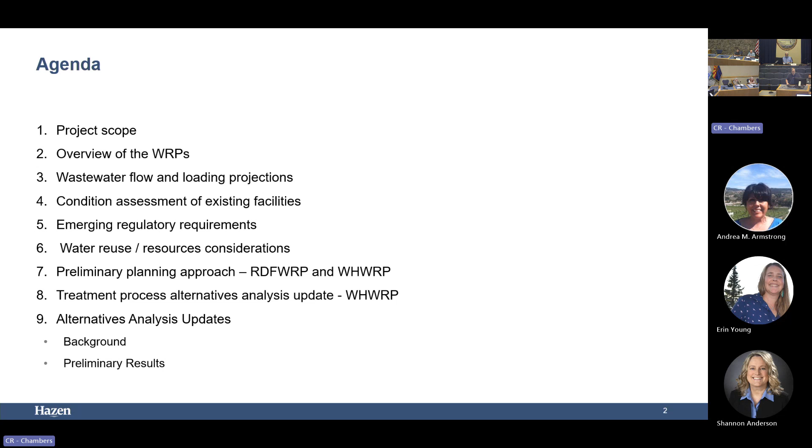So this is still a work in progress, just a caveat before I keep talking. The purpose of the project, from a slide at a kickoff meeting held with this body about a year ago, is to address the near and long-term management of wastewater and biosolids produced at the Rio de Flag and Wildcat Hill water reclamation facilities. It's an element of your Strategic Plan 2025 for the Water Services utility, to address Wildcat Hill in particular, but the way the system works, those two facilities are basically intertwined - what happens at Rio de Flag affects what happens at Wildcat Hill. They're linked together for sure.

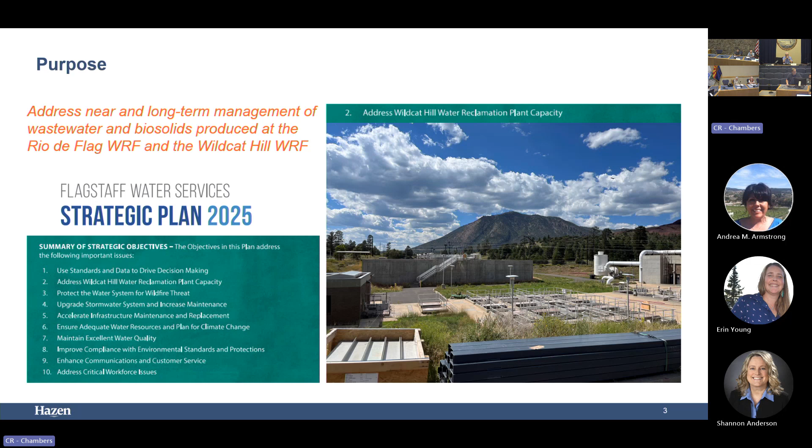Our scope of work includes the tasks listed here, an evaluation of the facilities as they exist and their reliability.

We did a condition assessment at the Wildcat Hill facility, a somewhat more limited assessment at Rio de Flag because it's newer. Spent quite a bit of time looking at the wastewater flows and loads, which are evolving over time. We also took a look at regulatory requirements now and in the future, looked at the hydraulic capacity of the facilities, their ability to pass the flow they receive, and took a look at the SCADA and controls at the plants. We're in the middle right now of evaluating alternatives for the treatment processes, improvements that might be necessary at the facilities to address existing and future needs.

There's some need for capacity increase. Solids disposal methods is part of our scope, our teammate Stantec is taking the lead on that, and they're still working on their piece of it, so I don't have a whole lot to share on that one. Ultimately, we'll be developing a recommended plan for improvements and implementation at the two facilities and a phasing plan. We also have tasks to look at staffing and training and evaluate funding requirements and financing needs.

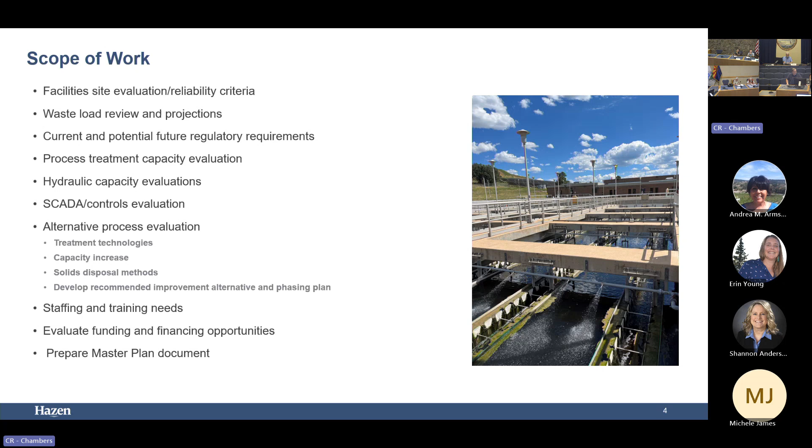So what are the key treatment facility planning considerations? One issue Flagstaff faces, along with pretty much every other wastewater utility in Arizona, is increasing wastewater flows and loads. The community is still growing. Even with water conservation, wastewater flows are increasing, not as fast as the loadings are increasing, because Flagstaff has a great water conservation program, a model for everybody, how well you guys have done with that. But there's still an increase in the wastewater flow to some extent, and the strength of the sewage, the amount of solids in a less rapidly increasing stream of water, is causing the concentration to increase.

The facility's age and condition is definitely a factor. Wildcat Hill was originally built in 1971, so it's over 50 years old now, and by the time any major work happens there, it'll be pushing 60. As somebody who's past 60, I can tell you that pushing 60 is not the greatest, but it's okay. And then there are these emerging regulatory requirements, the biosolids issues, and operability and reliability are important concerns, and we'll also look at costs. So all those factors go into our evaluation.

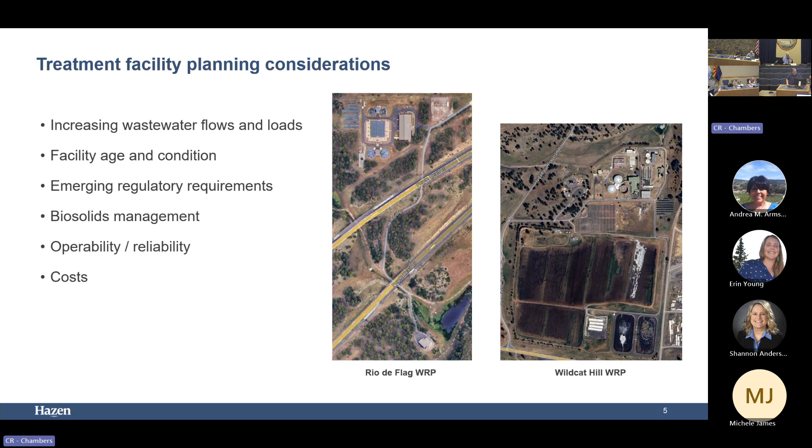This is an overview of the Rio de Flag plant. You may be familiar with it already, but just very briefly, it performs the Bardenpho nutrient removal process, a biological treatment process, and north is up on this slide. If you look at the basins on the left side of the slide, the flow comes in at the primary settling basins. There's a pump station between the primary clarifiers, then it goes through the aeration basins that perform the Bardenpho process. Final clarifiers are at the south end, and the plant gradually runs downhill to the south. Inside the operations building are the filters and the UV disinfection system, along with the blowers, equipment, office space, and all the rest.

So this plant has served you well since 1993. Also, the flow to the plant comes from an influent pump station, south of I-40, alongside the Rio de Flag wash. There's an interceptor sewer that runs through that area and passes by this pump station, and the pump station pulls flow out of that interceptor and sends it up the hill to the Rio de Flag plant.

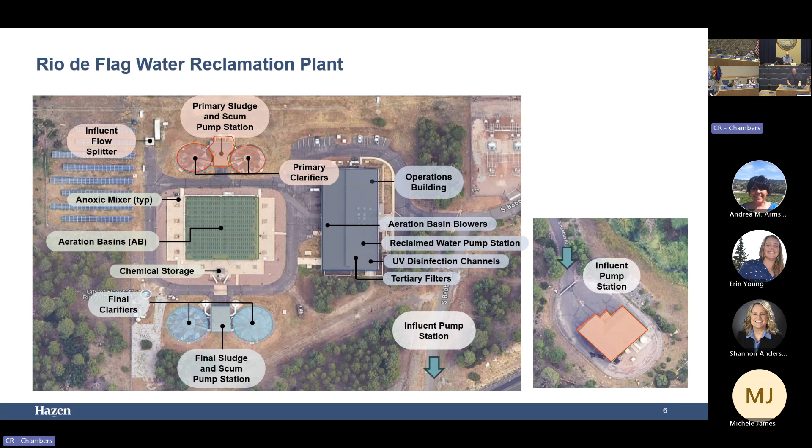Wildcat Hill, as I mentioned, was built originally in 1971. It's a different treatment process, and it's been a couple different treatment processes in its life. Right now it performs the IFAS system, the integrated fixed film activated sludge process, meaning there are suspended media discs in the basin that provide additional space for biological activity to occur. That plant also has primary clarifiers, then the IFAS basin for the biological process, then secondary clarifiers, filtration, and disinfection with chlorine at Wildcat. That reclaimed water, a portion of it is pumped out to reclaimed water customers. You can see at the bottom of the view there's a couple of solar installations there also.

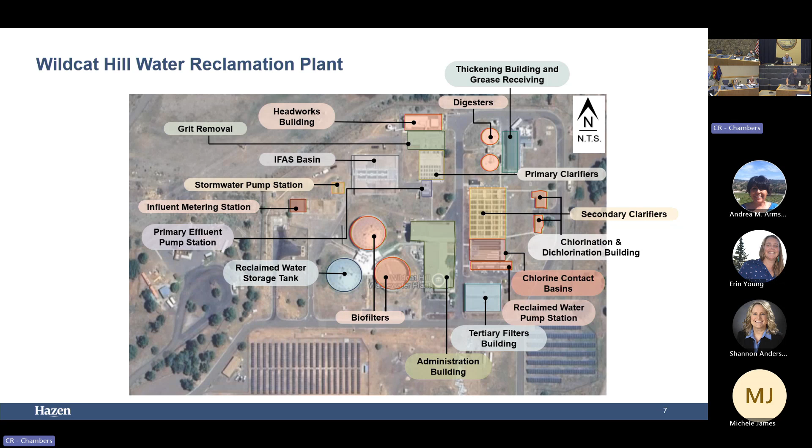So those are the two plants. You've gotten a lot of good service out of them. They are facing increasing challenges with the wastewater flows and loads. As I said, population is increasing, even with water conservation helping dampen the flow increases. You're still getting some flow increases, and the strength is increasing significantly. Another concern is that the peak events that stress the plant probably the most, especially Wildcat Hill, appear to be increasing in severity.

There was an event during the snowmelt season a year or two ago that caused over 12 MGD flow to Wildcat Hill, which is rated at 6, and that caused a lot of stress on the plant and the folks who work there. That's really the worst case scenario, when it rains on top of snow that's already melting. That generates runoff, and some of that infiltrates into your collection system. There's reason to believe that fire damage on the watershed is intensifying that runoff, so that's a definite concern with influent flow rates, especially to Wildcat.

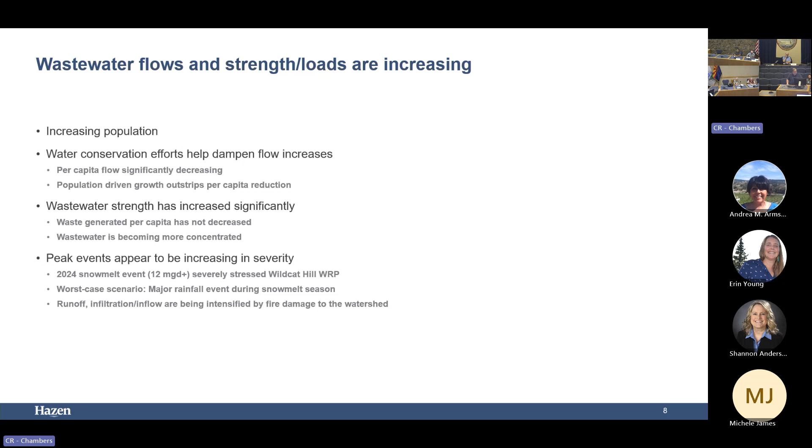So there are a lot of changes already happening at Rio de Flag that will help with Wildcat Hill's issues. As I mentioned, the two plants are interconnected, so the flow coming down the sewer that goes by the Rio de Flag plant, if it doesn't get pumped to Rio de Flag, ultimately makes its way to Wildcat Hill and gets treated there.

Rio de Flag was developed as a scalping plant. What we mean by that is it was created to pull off a portion of the wastewater flow, the scalp, and create a supply of reclaimed water in that portion of the city. The solids and residuals from the operation of Rio de Flag have always been returned back to the sewer and ultimately make their way to Wildcat Hill. So Rio de Flag removes the solids and the BOD, and some of that is consumed in the process, but a significant share goes back to the collection system and gets treated again at Wildcat Hill. It's been like that for a long time, and it's actually not uncommon in Arizona to have this kind of arrangement, a scalping plant to create reclaimed water.

But that puts an additional load on Wildcat. The other thing is that Rio de Flag has been base loaded at a sort of constant 2 million gallon a day flow rate, regardless of what's happening in the system. And there was some question whether there was ever really going to be 4 MGD generated in the Rio de Flag watershed or sewer shed, especially given the conservation program success.

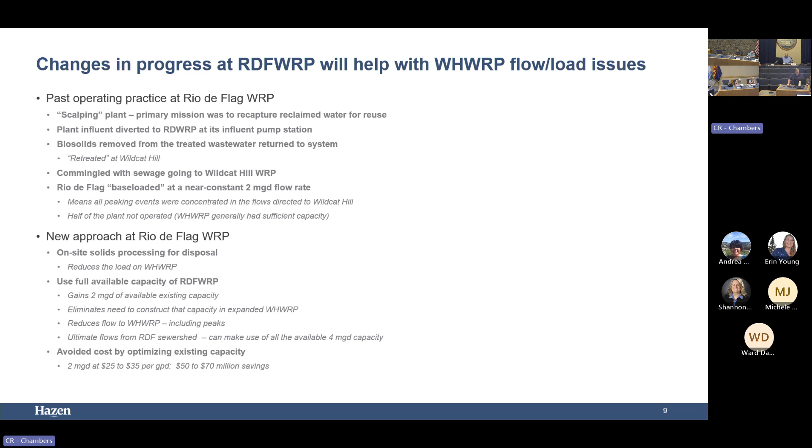So we spent quite a bit of time looking at the flows in the system, the loadings, the wastewater characteristics, and the sampling results, and we've developed a new set of flow projections for Wildcat and for Rio de Flag. Ultimately, Rio de Flag would stay at its existing capacity of 4 MGD, and the rest of the flow would wind up at Wildcat. We size these plants based on the average day of the maximum month, so maximum month flow, the Wildcat Hill MMF of 6.3 MGD for a planning year of 2045, which is our planning horizon for the project.

Wildcat Hill right now is rated at 6, but that's based on wastewater from years ago that was a lot less concentrated than it is right now. So I can't tell you that Wildcat's all set at 6 MGD the way it exists right now, because that's 6 MGD of a much stronger waste.

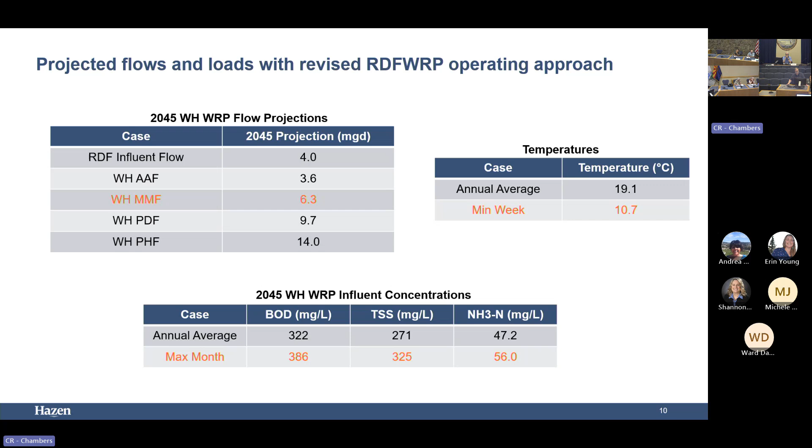So I mentioned that at the outset of the project, we did condition assessment work at the two plants, and there's a lot of detail on that which I'm not going to get into now. But just some basic context on Rio de Flag.

As I mentioned, it was built in '93 as a 4 MGD treatment plant. It's basically that same plant now. It still has the Bardenpho process. There have been various improvements over the years since then, and the on-site solids processing project is in development now. Most of the plant's over 30 years old, but overall it's in good condition, and it can justify a rehab as opposed to a replacement.

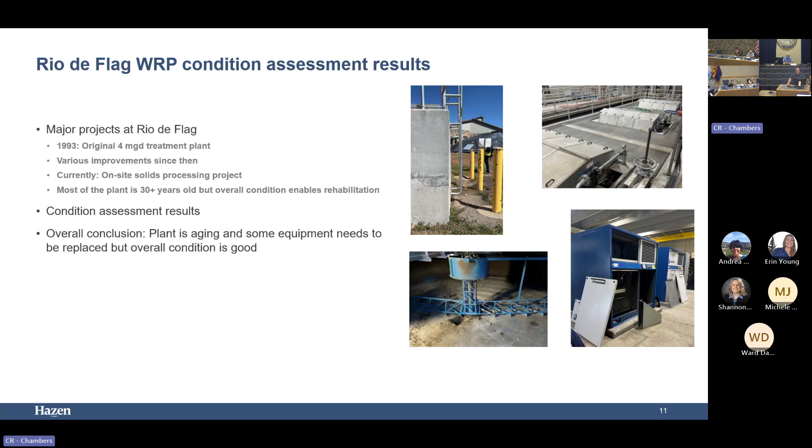So the structures are overall pretty good. I've got an example here of a structure that's got some cracking. There's a sludge collector there that obviously needs the coating replaced. Those are the filters, which are in generally good condition, and those are some of the blowers that we took a look at during our condition assessment. So the plant is aging and some equipment needs to be replaced, but overall the condition is good at Rio de Flag. There'll be a lot more detail about that in our report.

Wildcat Hill, the situation is a little more difficult. The original 3 MGD plant was built 54 years ago. It got expanded to a nominal 6 MGD - it was called 6 MGD at the time because that's probably what it was. There was a major project circa 2005 to make the conversion to the IFAS process, which intensified the treatment process to get more capacity out of the plant, basically as it existed. And that's been useful - it's been in operation now for 20 years.

But there are a lot of components of that plant that are 40 or 50 years old or more, and they're showing the signs. So there's quite a bit of equipment that is in need of replacement. There are some portions of the structures that are showing their age and need for rehabilitation at least.

I should mention, just as another point of comparison, that a lot of the projects we're doing these days are rehabilitations or evaluations of existing treatment facilities. There was a wave of wastewater treatment plants built in Arizona back in the 80s, and I still kind of think of them as new, but they're 40 years old. And so a lot of them have similar issues where the concrete is starting to show some deterioration, cracking. It needs a rehab at least.

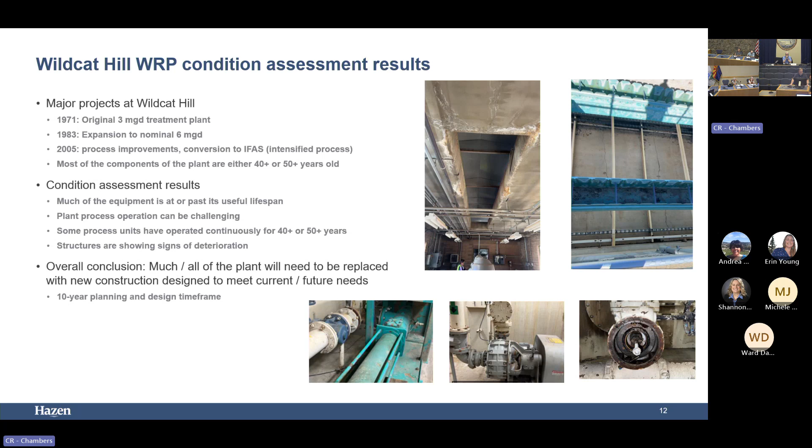Talk about the emerging regulatory requirements a little bit. So as I said, both plants have consistently produced Class A+ reclaimed water, meet the BADCT standards that are part of the Aquifer Protection Permit Program, and they comply with aquifer water quality standards that apply. And as I said, that really is a tribute to the skill and hard work of the O&M team.

There's a lot happening on the regulatory front now that isn't going to make it any easier. ADEQ just recently updated its aquifer water quality standards to make them more congruent with the federal drinking water standards. Without getting too far into the weeds, the basic purpose of the Aquifer Protection Permit Program is to protect aquifer water quality. The benchmark for that is making sure our aquifers remain drinking water quality aquifers, which translates to meeting federal drinking water maximum contaminant levels.

For example, the MCL, maximum contaminant level, for nitrate is 10 milligrams per liter. Your sewage has 50 in it. That's why the plants have to denitrify. That's been a requirement for quite a while now.

Just this summer, ADEQ, for the first time in like 20 years, brought out a new set of additional aquifer water quality standards. This little table is a snip directly off the DEQ website. You can see they've lowered the standard for arsenic, created standards for bromate, chlorite, and haloacetic acids, and made some tweaks to the microbiological contaminant requirements. They've tightened up the total trihalomethanes standard, which is the disinfection byproducts formed by chlorine disinfection. And now there's a standard for uranium.

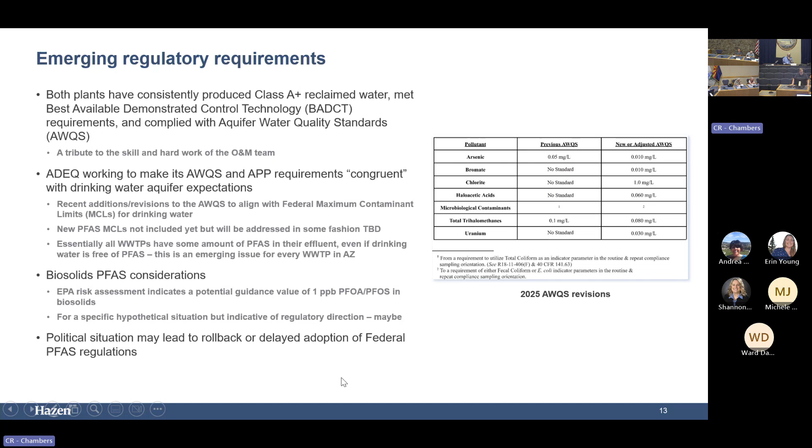And then we come to water reuse and resources considerations. You already reuse a fair amount of your reclaimed water. As you may know, DEQ updated the water recycling rules about 5 years ago to legalize direct potable reuse of reclaimed water. We've had indirect potable reuse through recharge and other approaches for a long time.

And since they legalized DPR, they've been in a rulemaking process ever since to define what requirements would apply for advanced water purification to create a DPR worthy product. And it's going to be extremely expensive.

But despite that, the ongoing drought in the Colorado River and our general water shortages, especially down where I live in the valley, have spurred a lot of interest in DPR. Everywhere from the city of Phoenix, which is out there making no bones about their intent to spend several billions of dollars to develop AWP facilities, including 60 MGD at the main wastewater plant at 91st Avenue, which they're estimating right now at about $3.5 billion.

So if you do the math there, that's $50 to $100 per GPD of capacity after the wastewater is treated. So that's on top of that 25 to 35 I was talking about earlier. So you multiply 100 by 6 million and you start to get some pretty big numbers, for example, if you were trying to put it in the Wildcat Hill context.

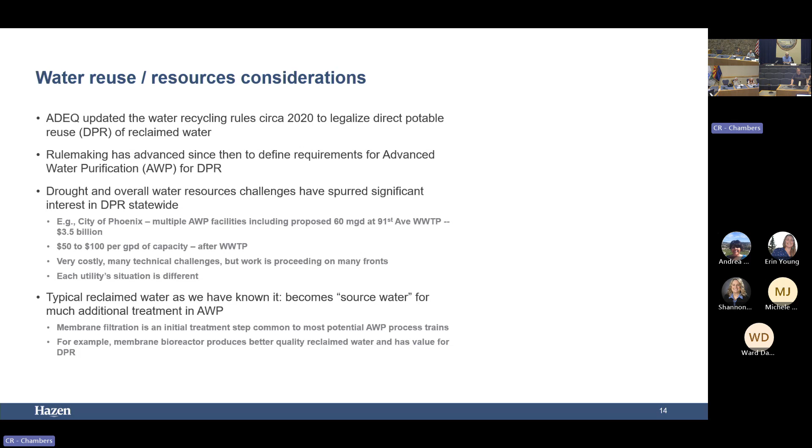And so that does circle back, why does that relate to what we're doing now? For example, we have an alternative among our process evaluation that looks at a membrane bioreactor as one of the treatment processes that we're considering. And that's a membrane separation process that would actually check one of like 9 process boxes that need to be checked for AWP, but it does produce better quality water and has value for DPR if that ever became a thing here.

So bringing this now to the realities of the 2 facilities. So the preliminary plan, as we see it for Rio de Flag, I've already mentioned a lot of this, is make full use of the existing 4 MGD as the flows from the sewer shed necessitate. So that pump station will pull off the flow that's coming by in the sewer until it reaches the 4 MGD level that the plant can handle, with some peaking also considered.

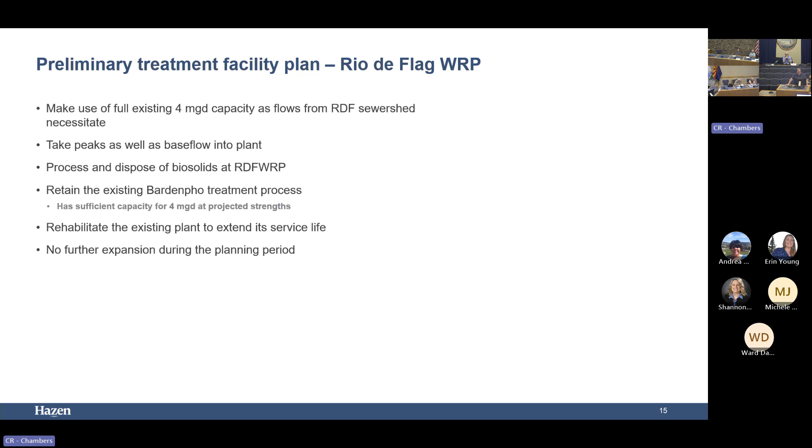The biosolids be processed on site there and disposed of from Rio de Flag without going over to Wildcat. The Bardenpho process works well. It has sufficient capacity for 4 MGD, even at the projected increased strength of the wastewater. We say rehabilitate the existing plant to extend its service life and no further expansions during this planning period.

Wildcat Hill, we're still working on our evaluation there. We do think that most of the plant has reached the end of its service life and the facility will need to be replaced. As I mentioned, sort of a 10-year program to plan and design the replacement for the plant. So by the time that's done, the plant will be well past 60 years old, and I think you will have gotten your value out of that plant.

And again, the changes at Rio are going to help Wildcat. The flow projection that I showed you earlier is 6.3 MGD for the max month flow at Wildcat, but the peak events remain a concern. Those 12 MGDs are not something that the plant really is intended to handle as it exists. So that's definitely a planning consideration in the future.

We're looking at several different treatment process options with respect to the biological process. And our teammate Stantec is still working on the biosolids options.

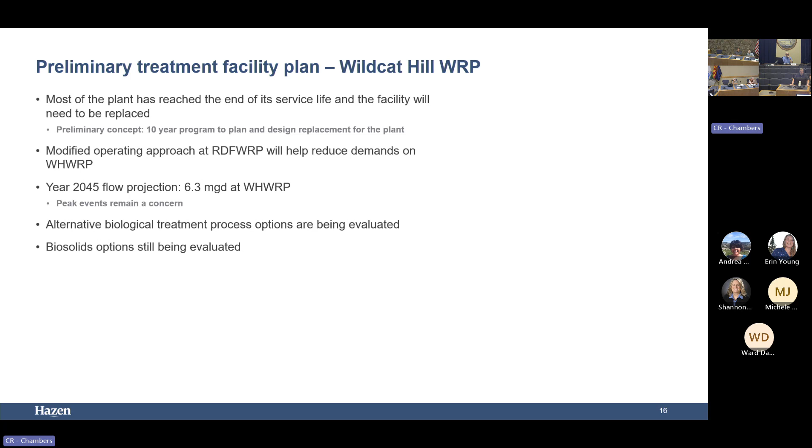So just a little bit about what we're looking at for treatment at Wildcat. We started out with a wide roster of potential treatment processes, some well-proven, some a little too unproven. We worked in conjunction with city staff to narrow the field of options to, I guess what I'd say would be realistic possibilities. We did a multi-criteria decision analysis to reduce the options to 3 finalists, which are the Bardenpho process, which is what Rio de Flag has, and your staff already knows how to operate successfully. It's a very robust method of removing nitrogen.

Densified activated sludge, which looks a lot like traditional wastewater treatment as we know it, but with an intensified process with a thicker wastewater in the basins, and then the membrane bioreactor, which I mentioned, which is a totally different look, and I'll get a little more detail on that in a second. We're doing process modeling of each of these to determine the design criteria so we can compare them. And then there are a few common considerations for all 3.

The sludge in Flagstaff, due to the cold temperatures, is not the most readily settling wastewater sludge. It tends to be fluffier than what we'd have down in Phoenix when it's 105 out and the wastewater is already 95 degrees. When it's 10 here, it's a little different situation.

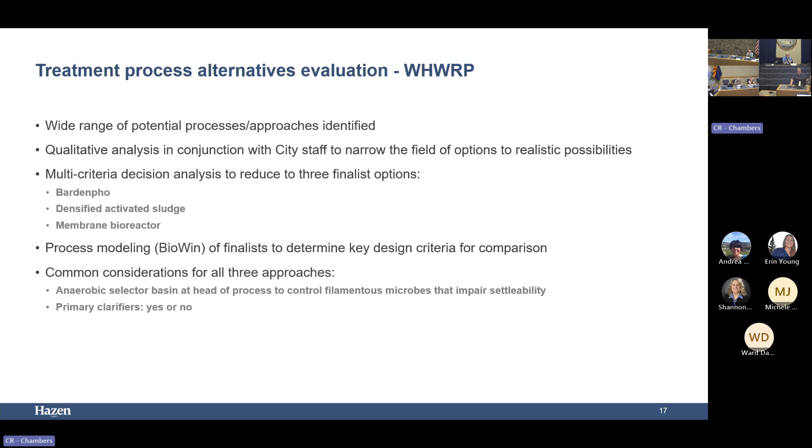Here's a little bit more about the three alternatives, I'm not going any deeper than this in this meeting. I mentioned Bardenpho - it's a similar process as at Rio de Flag. There are multiple stages that use biological processes to remove the nitrogen. One plus would be that you'd have two plants that operate basically the same way with Bardenpho.

Densified activated sludge - the real strength of this process is that you cultivate a population of microbes in the wastewater plant that do the breakdown of the waste and are readily settleable. So those two beakers in the photo at the bottom of this middle column - the beaker on the right is a sample of typical mixed liquor from a typical wastewater plant after it's had 5 minutes to settle. The beaker on the left is also after 5 minutes, actually 2 minutes if you look at the time scale at the bottom, from a densified activated sludge plant. So it drops much quicker, and you can get a lot more capacity out of your clarifiers and aeration basins.

Alternative 3 is a membrane bioreactor. It operates at even more concentrated levels than densified activated sludge, so the basins are smaller. It uses membranes and modules racked up into cassettes that basically suck the water through those membranes and out, leaving the solids behind, which are then recirculated through the process. Because it's membrane separation, you get the highest effluent quality and the lowest solids content. That has value in some cases.

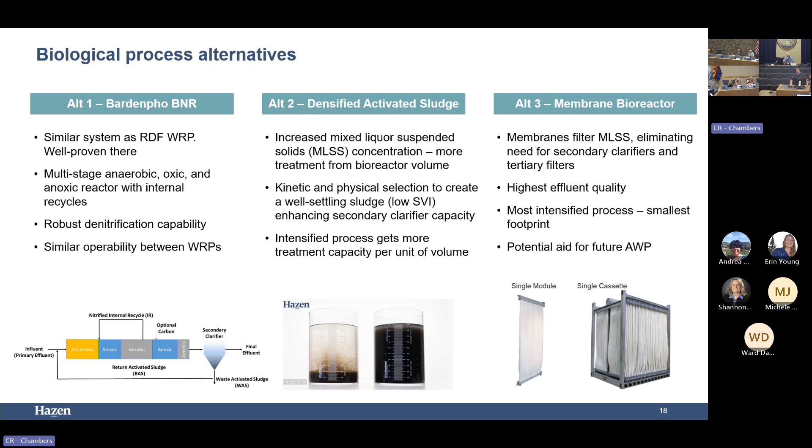Sometimes it doesn't have any value really because your effluent is already low turbidity, but this is even lower by a factor of about 10. It's also the most intensified process, so smallest footprint in concept, fewer costs for basin construction and so on. As I mentioned, it might be helpful in a future where AWP becomes an interest, but that's not really a concern right now. So that's what we're looking at.

Our next steps: we're going to finish this evaluation of the biological alternatives. Our teammate Stantec will finish the biosolids analysis. We will knit those results together to develop an integrated recommendation, a whole plant solution for both plants working together. We'll look at how those projects could fit onto your site, take a look at the costs on a high level, and then present all that in a report - that's all going to happen by November, according to Mac.

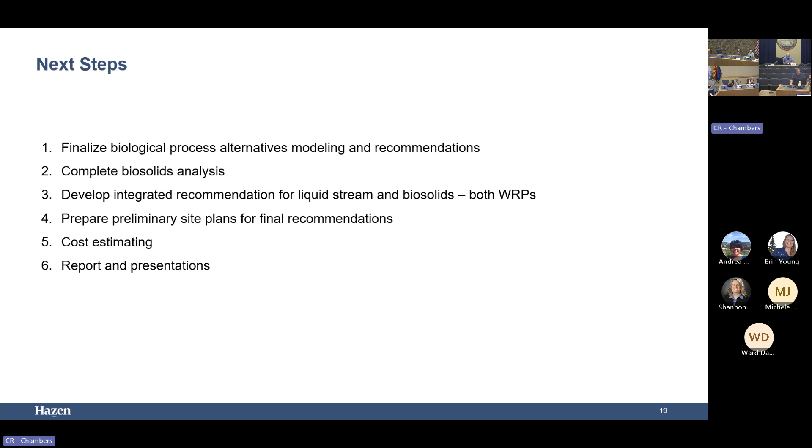So, but anyway, those are our next steps from here to completion. We are well along the track here, but we're not quite there yet. That's all I had to present. I appreciate you listening to me drone on, and I'd be happy to take any questions or comments the commissioners may have.

Thank you, Doug. Any questions from the commission? Don? I have a question related to something you said earlier in your presentation.

It has to do with peak events increasing in severity, and I think you related it to heavy rain, heavier than normal rain runoff during the winter, rain on snow runoff during the winter. But it also strikes me that there are a couple other components that are impacted by how the city is being developed and by where the city is located in relationship to at-risk national forest lands.

There's been a lot of effort over the last couple of decades to mitigate runoff from fire scars, from fire burn areas in the national forest. The city of Flagstaff itself has probably significantly increased its urban footprint on the environment locally with a lot of new roads, impermeable parking lots, and other developments that represent significant potential for adding additional runoff to a peak flow event that might not otherwise have occurred.

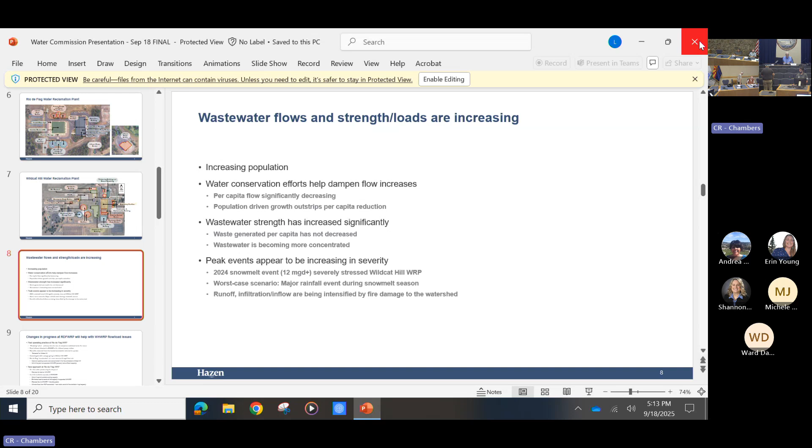Informational items to and from the chair, commission members, or staff. We'll go around the commission for any information. Nothing from me, nothing, nothing. Matthew, nothing. We're going to have a busy month next month, I think. We've got the Pine Canyon tour coming up on October 6th, for those of you that are able to attend.

I understand we've been invited to an executive session with the council on October 21st, and October 23rd a joint Water Commission and Council meeting to talk about the Red Gap Ranch work going on with reclamation. Will that take the place of the regular Water Commission meeting next month in October, or will we still have a Water Commission meeting October 16th? We'll likely still have the regular meeting on the 16th - we have a couple things on the agenda that aren't regarding Red Gap Ranch. Unless you'd like to push it out to November as chair. If we have items we need to discuss, I'm fine with it. I was just curious - it's going to be a busy month for the commission.

Okay, Lee, do you have anything? I do. Andreas sent an email out earlier, and I'll just read it so it's on the record here. So we've had some movement with Pine Canyon. Here's the email, I'll read it so I don't leave anything out.